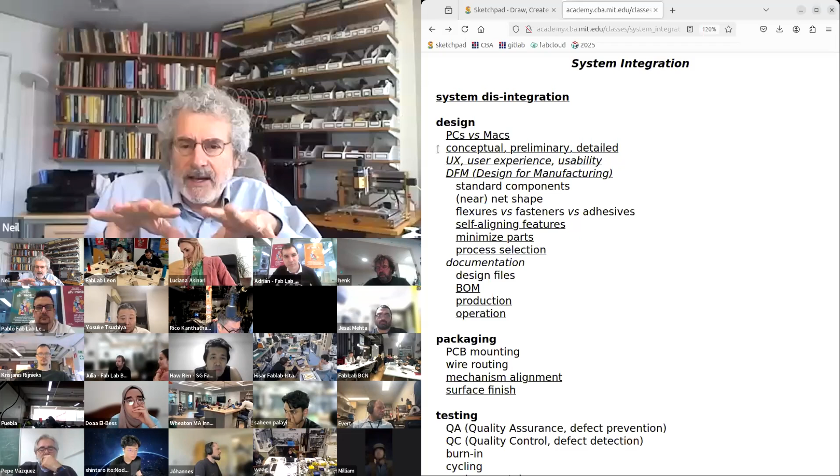Broadly, design studies go way beyond the class, but just a few comments about it. One is terms in design are similar to spiral development. Conceptual design is thinking about what you want to do. Preliminary design is roughing it out. And then detailed design is exactly that, it's filling in the details. But you don't want to do detailed design too early - you want to pass through these stages to refine the design before you fill in the details.

This is a recitation done by a Fab Lab guru that's a nice tour through the subject of how to make designs usable. He talks about a number of basic principles of design. It should be easy to figure out what it does. He has this great example of a button that can go either direction, and it's just not apparent what the button does and what it means.

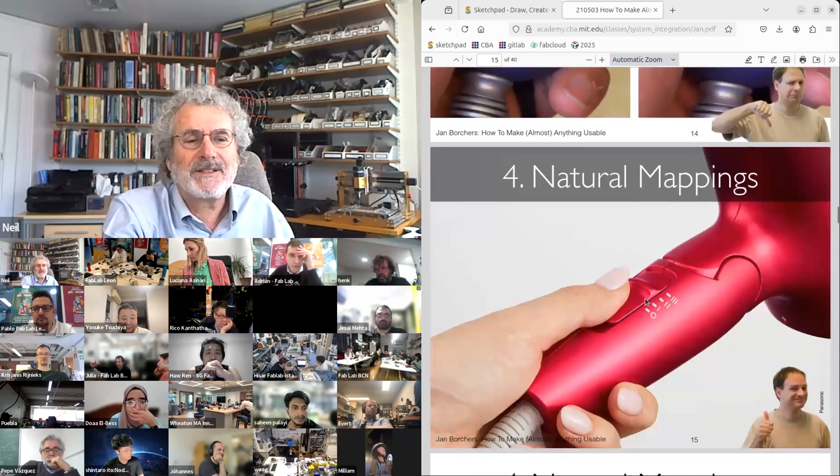You want mappings to map onto the physical action. You want to avoid modes, so you need to know what state the system is in. These are just some general principles of good design.

This was a topic just on usability, and there are a number of versions of principles for what make good interfaces. These sound obvious, but each of you have struggled with systems that violate these basic principles. So these are just some pointers for principles of good design.

Then DFM is design for manufacturing. The class you're taking will help you with that, in that there's a huge difference between design by somebody who's just sitting at a computer and design with somebody who's familiar with the process of fabrication. So you don't want to design just what you think, you want to design around the process to make it.

One approach is trying to use a small standard set of components. Net shape means you want to minimize processing. For example, 3D printing done well is net shape - you make the final shape in one go. Typically in manufacturing there's some post-processing, but you want to try to minimize waste in the process.

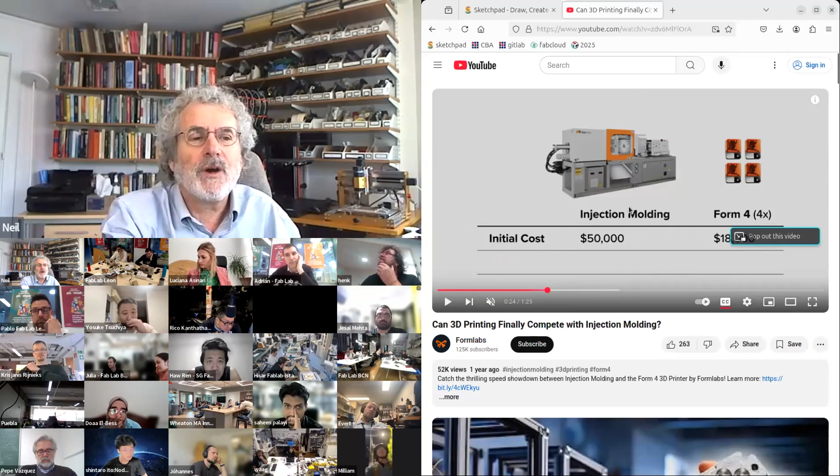The reason I'm showing this is Formlabs did a competition between fast 3D printing and injection molding. They're a bit biased, of course, but showing that a farm of fast 3D printers can beat an injection molder for a reasonable sized run. So part of DFM is picking the process you're going to use to make it and then designing around the constraints of that process.

And the design, for example for 3D printing, you need to get the resin out of it. For injection molding, you need the runner to get the melted plastic into it. So you want the stages in the fabrication process to propagate all the way back into the design process.

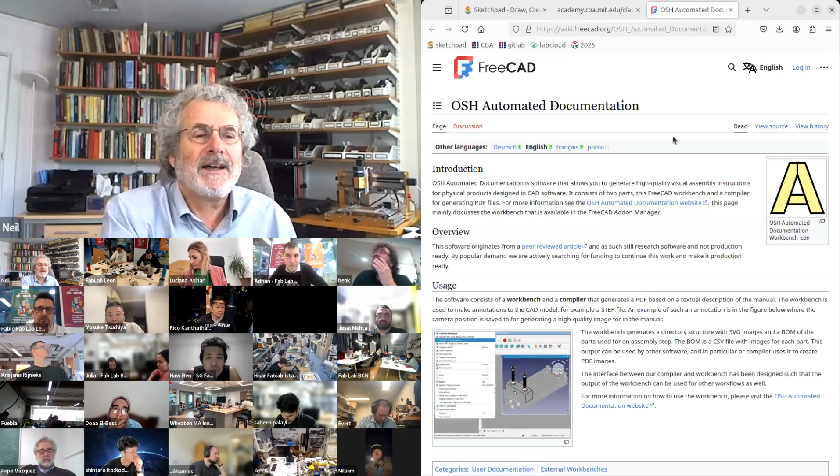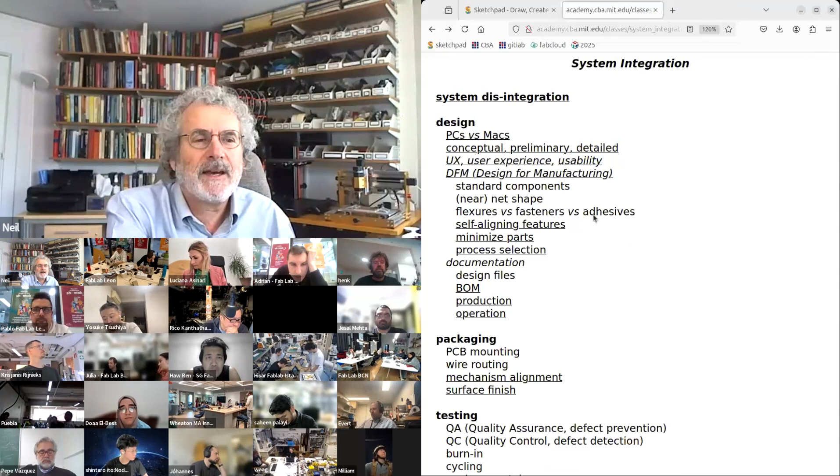This is a really nice tool that comes out of a group at a Fab Lab in Hamburg with collaborators that aims to automate documentation. You do the design and it automates producing the documentation for it. Part of the documentation is how to use it - Howtoons was a project started by former students that make these really great cartoons to teach you how to do things. The manual can be boring and tedious, or you can add value in explaining how to use it. These are all steps in documenting your work.

So please don't finish this class with a rectangular box with laser cut finger joints and call it done. Think about packaging that's interesting to interact with, design of a system that's interesting to interact with, that's satisfying for the ergonomics.

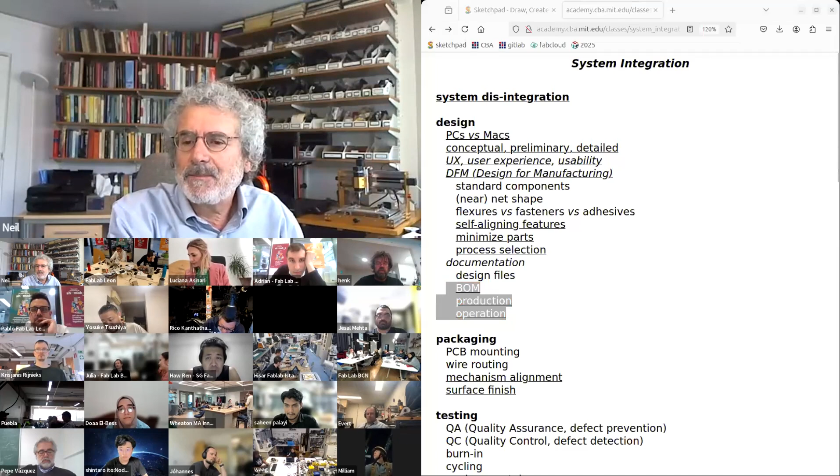Yeah, and I'll absolutely - that's a nice comment. Let me go back to...

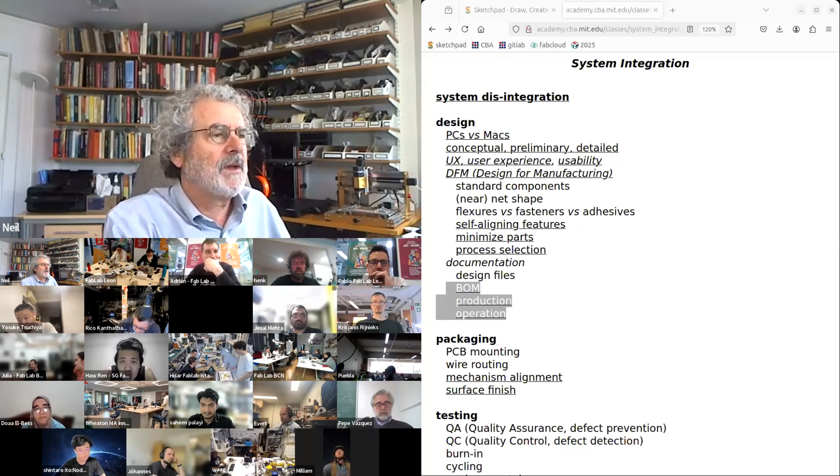One of the gods of what I'm talking about here is Don Norman, and this is a fabulous book about the design of everything. The cover is a teapot that pours on your wrist. It's a beautiful tour through good and bad design of everyday things. I'll add a link to that.

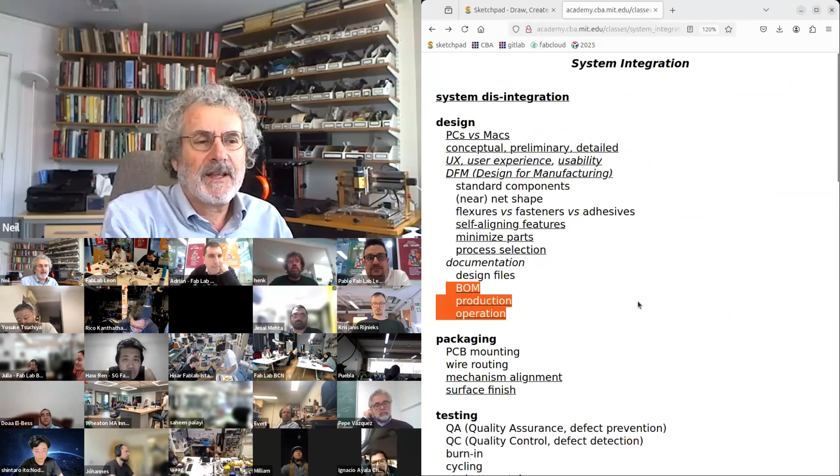So just some general thoughts about good versus bad design. It may sound soft and intangible, but it's the difference in the fate of Apple versus IBM.

Then comes packaging. So if we look at this project, one thing that's wrong is circuit boards can't be just dropped in a box - they'll fail if you jiggle them. You need to mount the electronics.

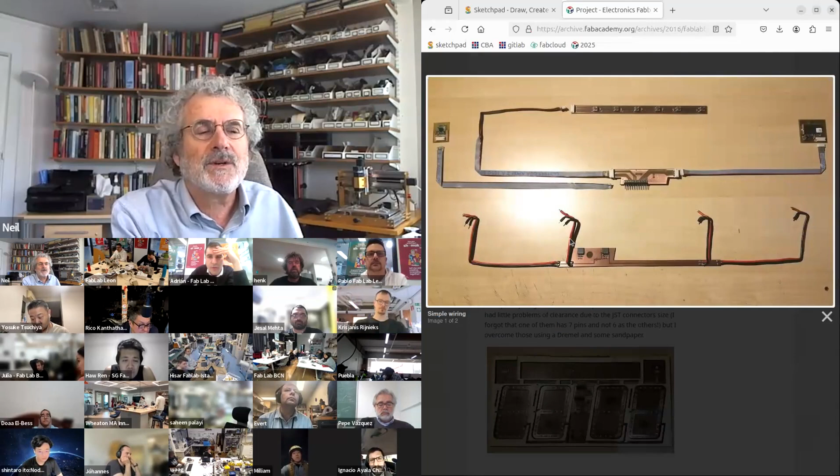Let me add a link. So in this project, you'll see this design of the wiring harness. Rather than a tangle of wires, they designed the wiring to connect all the parts.

Here's why that matters. When the Airbus A380 was made, they made a mistake in the wiring, and it ended up being a $1 billion problem from getting the wiring wrong. One of the most common failure modes, and I'm going to talk a lot about failure modes, has to do with wiring.

So once you have a physical design, once you have the components placed, part of the design is the wiring routing.

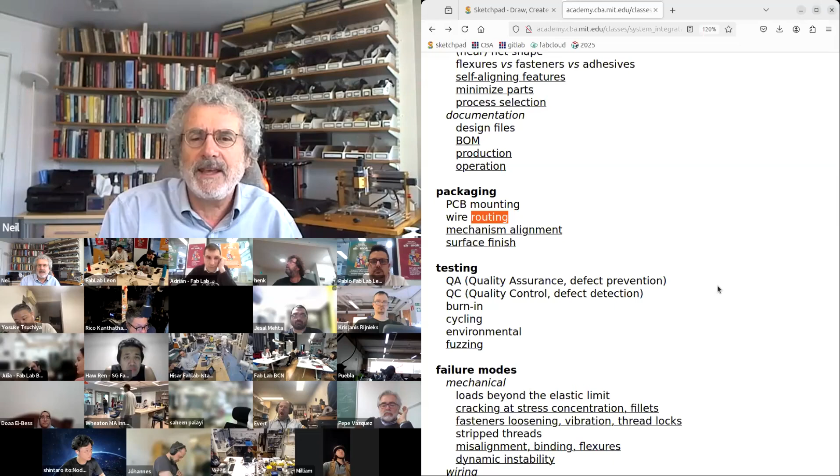It's easy to neglect wiring design as a detail at the end. In the Airbus case, it cost $1 billion to fix a mistake in it. You have to design the wiring.

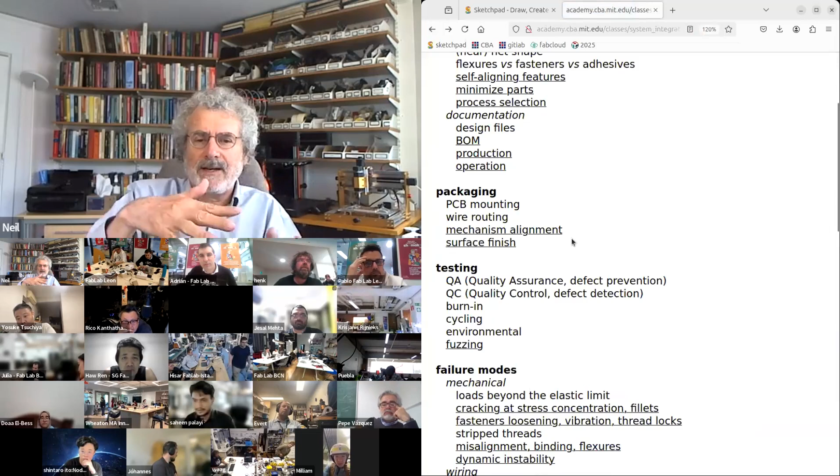The reason I have this linked is when you assemble the system, there might be slight misalignment. This is Prusa explaining that when you assemble the 3D printer, crucially, there are degrees of freedom to micro adjust and tension the wires. So in this housing, there's a little bit of degree of freedom to rotate it to take up slight misalignment when you fabricate it. You want to think about the error budget for the system and having enough degrees of freedom so that you can take up slight misalignment when you make it.

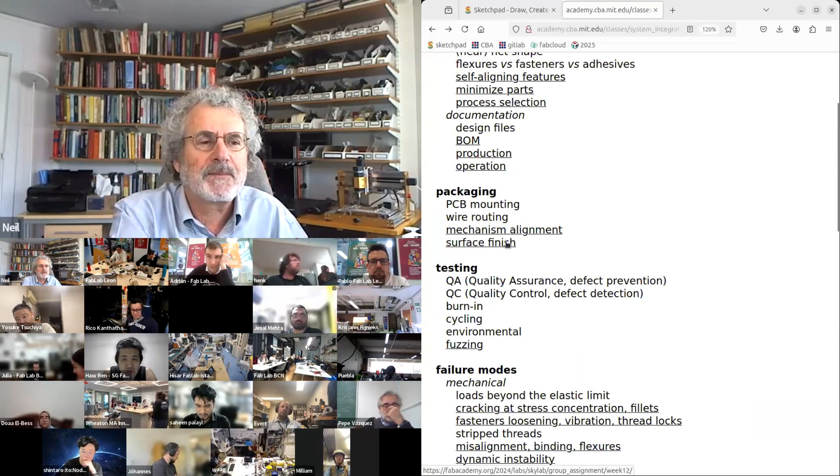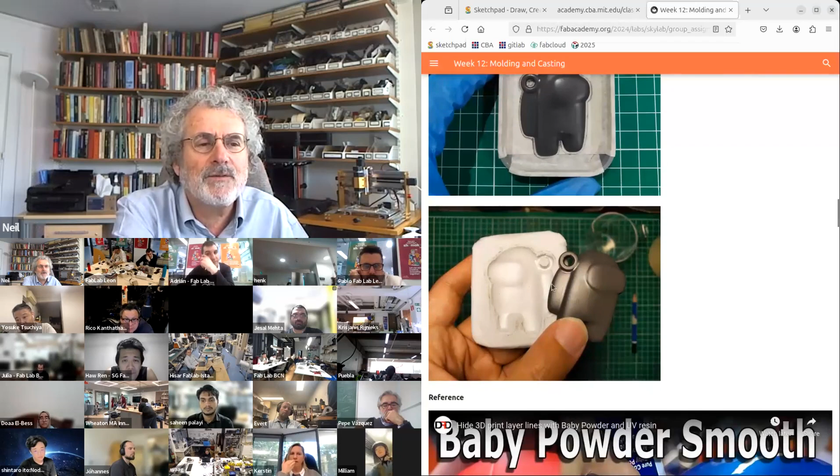In molding and casting, when we talked about molding with printing, this was an example of taking an ordinary FDM print and just doing a really good job finishing it. They're making beautiful molds from it, starting with just the FDM print and then post-processing it to make this beautiful surface finish.

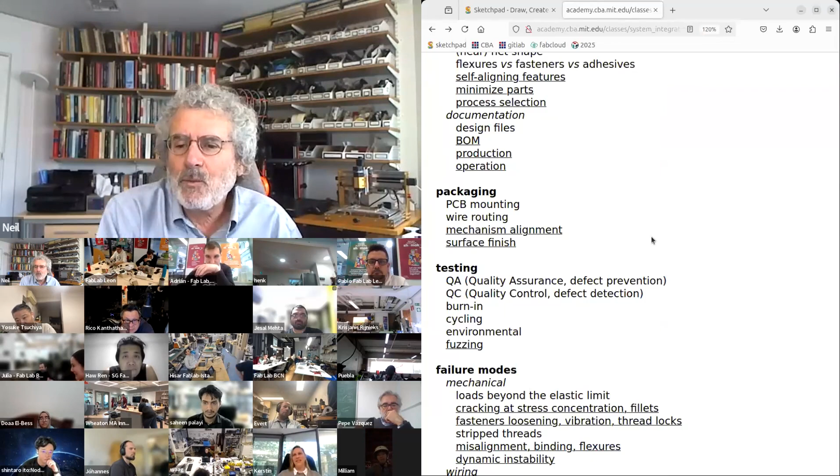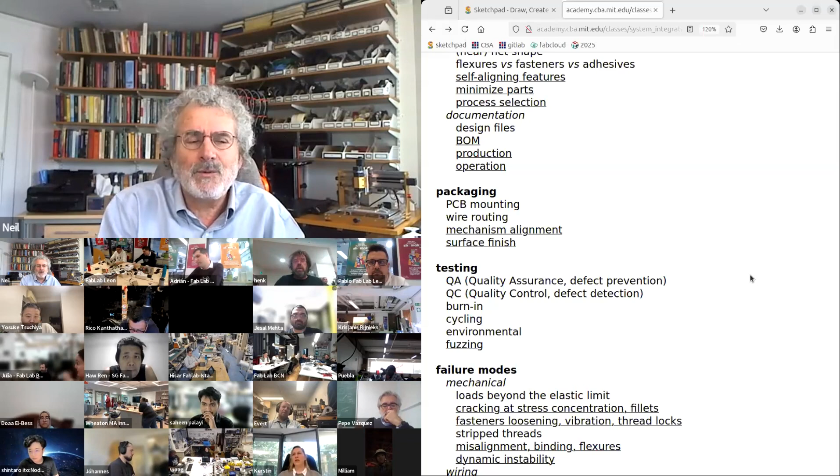One more thing that makes me sad is when you have rough machining or crude 3D printing. Beautiful objects are nice to look at and they feel good to touch. So don't neglect the surface finish at the end of the project.

So part of this week's work in designing and documenting the system integration is we're going to look for all of these things: where does the electronics go, how is the wiring routed, how do you align and assemble the system.

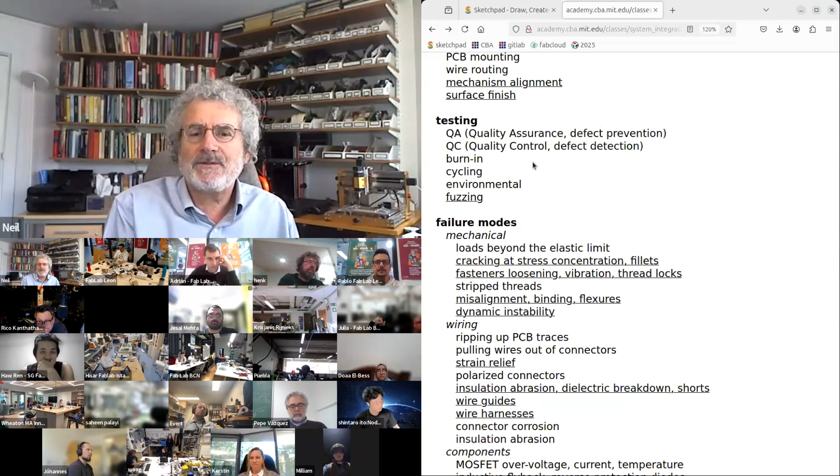Then comes testing. Almost everything you make will fail sooner or later. You want to fail while you're developing and testing it, not after you send it out into the world. Quality assurance is preventing defects in the first place. Quality control is finding defects and fixing them. Testing is identifying the defects.

First of all, one of the best ways to test a system is to shake it. If you shake it or drop it, does it keep working?

Burn-in testing is leaving the system running. For example, one kind of failure mode in software is a memory leak. Everything runs fine, but if you leave the system running for a few days, you're slowly leaking memory and it grinds to a halt. If you make a motor controller, it may work fine when you move the motor, but you're overheating, and if you run it for a few hours, you burn out the transistors. So just run the system for a while.

Cycling, turning everything on and off a lot of times, stresses the system. Often there are power transients and mechanical loads. So turn your system on and off a lot of times.

Environmental testing is: does it work when it's hot, does it work when it's cold, does it work when it's humid? There are all sorts of failure modes for that. Fuzzing is an interesting kind of testing, where you spray random junk as input to your system. It's a common way to test for vulnerabilities — you just give it nonsense and see how the system responds. You can uncover a lot of security vulnerabilities by fuzz testing.

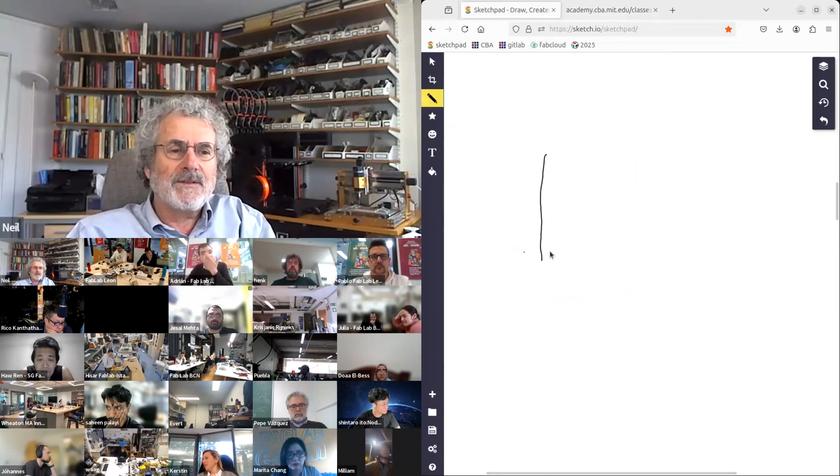Okay, so now I'm going to spend a while talking about how systems fail. First is if you look at stress versus strain — remember, stress sounds like press, strain sounds like pain. So you apply stress and the system responds.

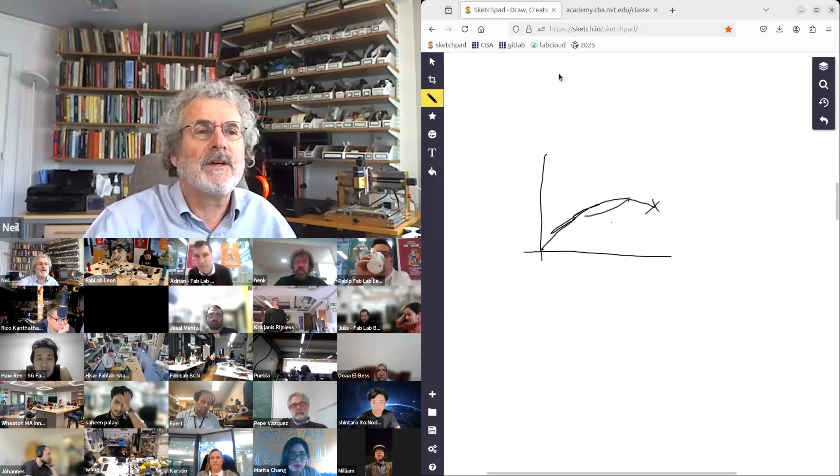There's a linear range where you're pushing and it's elastically deforming; this is fine. There's a nonlinear range that's usually okay. Then there's a range called plastic flow, where it becomes hysteretic — if you push on the system, it doesn't come back to the same place. That's bad, you're deforming it. Eventually you get to the strength limit where it fails. So you want to make sure loads are always within the elastic limit.

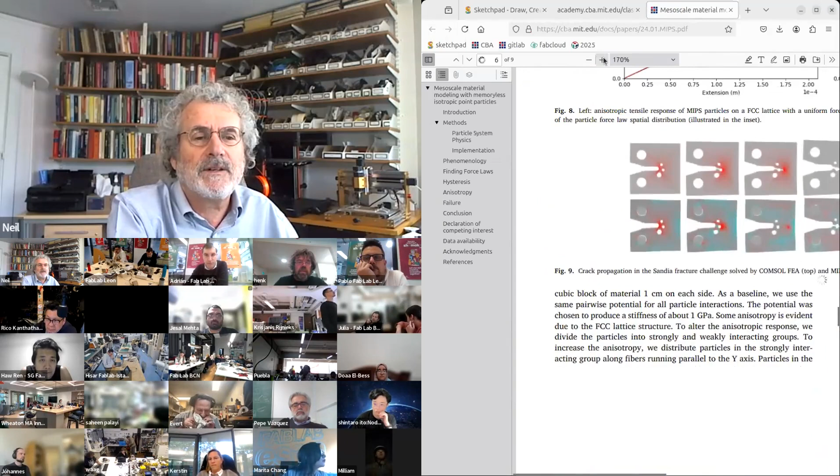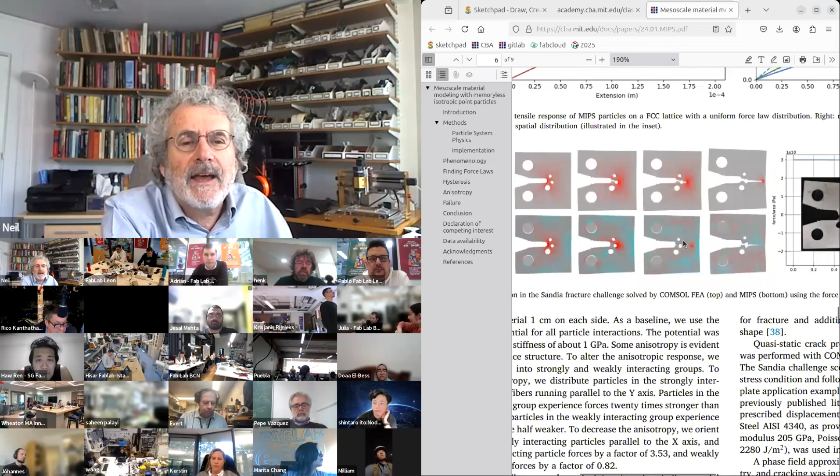I've linked this paper on a project we did on multiphysics modeling, where we cover how to model failure. Here's a test part, and when you start opening it up, there's a stress concentration, then you'll see the crack appears there and it propagates. So when a system fails, it fails where the stress is concentrated.

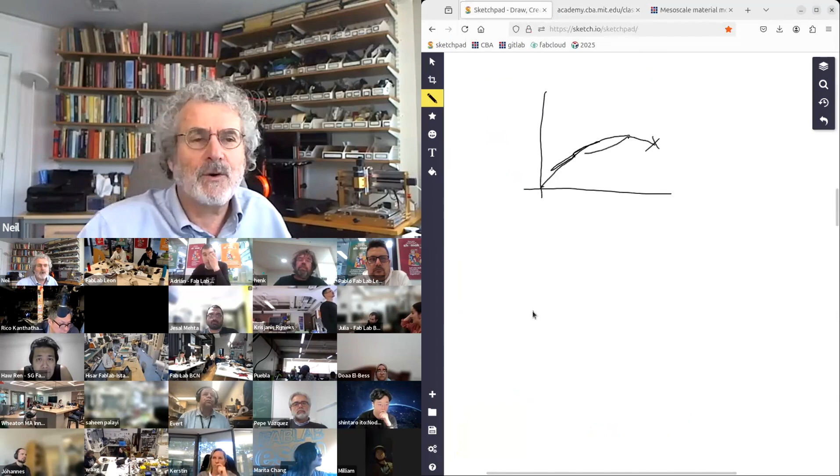A very common form of that — in fact, I just did this weekend. I failed to do what I'm about to describe for you. I needed to make a flexural clip that fit into a pipe, and so I had designed the shape of the flexural clip.

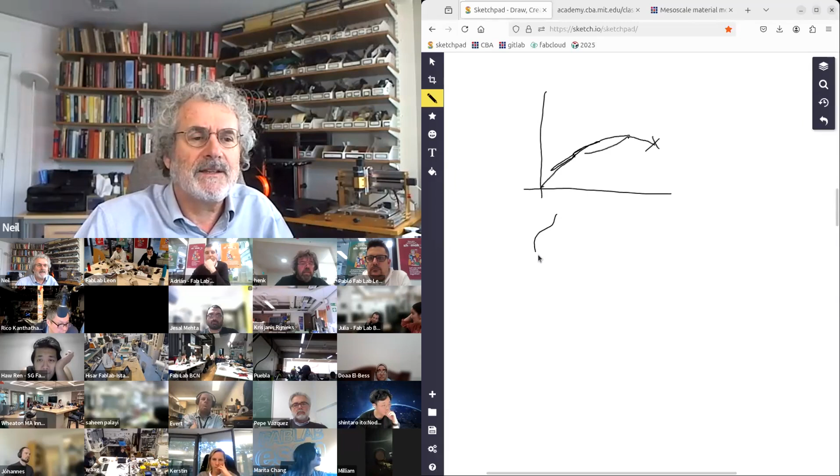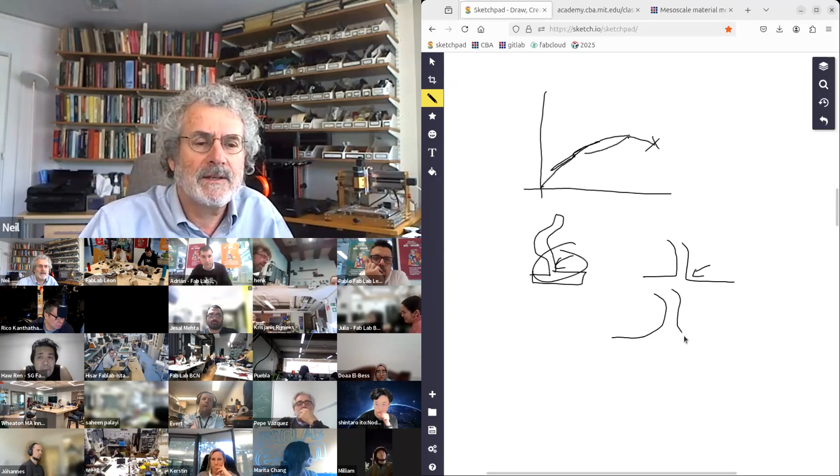And then I just put it on a base like that, and it snapped right there. The distinction is, if I blow that up, I had a sharp corner where it failed. Instead, in the second version that works, I have a fillet coming in like that. So the difference is that's a sharp corner, here I've filleted the corner. At the sharp corner, a crack initiates and propagates. When you fillet the corner, it's hard for the crack to initiate. So just simply filleting corners has a huge difference.

I'm just following along with the chat.

Filleting the corners makes a huge difference in the likelihood of failure.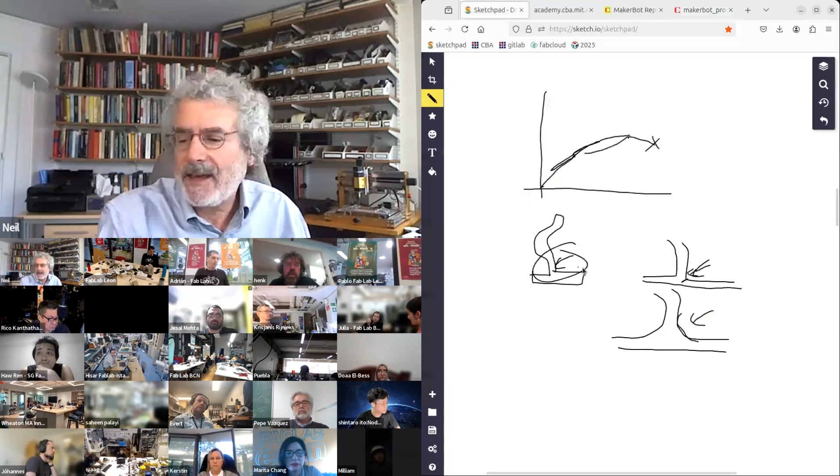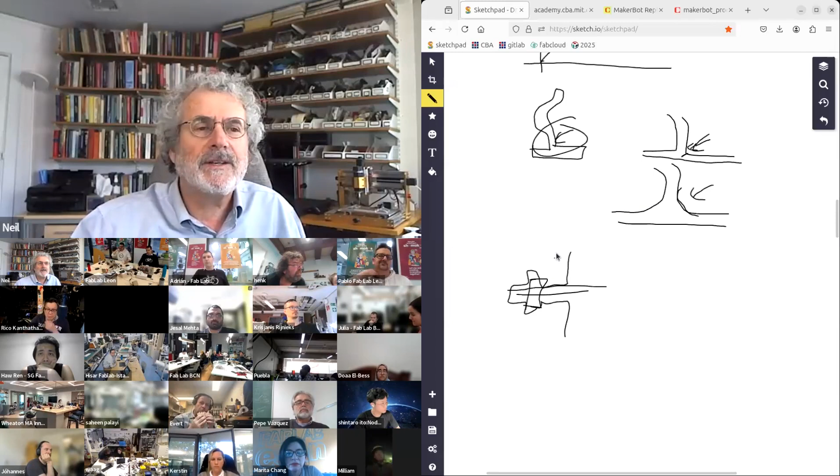This is a review of the original MakerBot Replicator. Bre Pettis describes it as on-the-job training. He did a lot of things wrong, and the most important thing he did wrong was this: nice laser cut wood looks great, but in that design he nicely designed a shape like that in the wood, and then the threaded rod comes in, and then he has a nut here. The problem is this is wood.

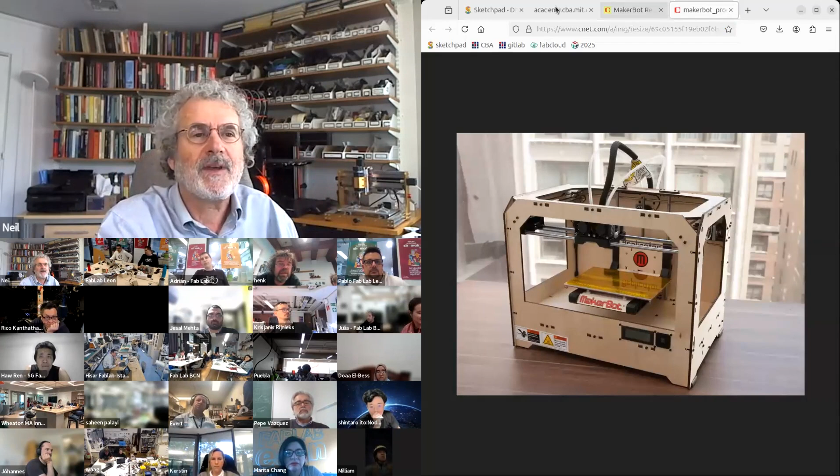If you go back to this range of plastic deformation, when you tighten the nut, it's very slightly deforming the wood. The wood is plastically deforming, it doesn't come back to the same place again. So you could assemble the MakerBot, get everything working, and then in a few weeks it's no longer printing well, because everything is drifting and moving.

So preventing fasteners from moving their position, if you're using fasteners, is essential. That's where you want to have thread locks, lock washers, lock nuts - things that prevent fasteners from moving. One more problem with threads is you can strip them.

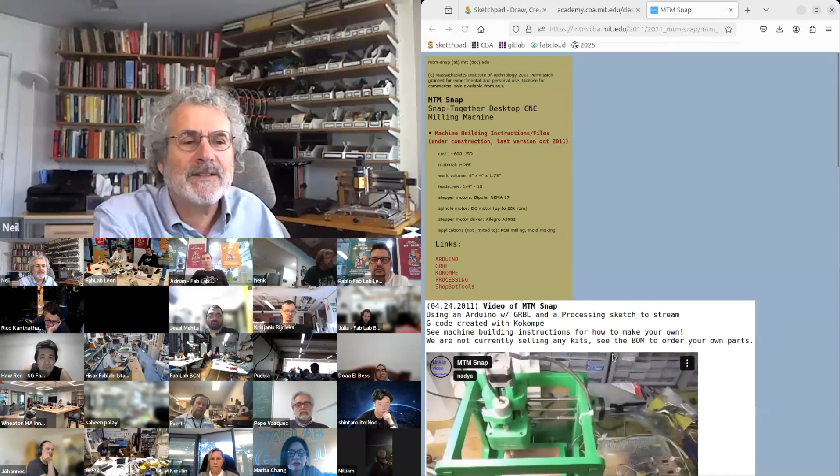If we go to the snap machine - let's see if I can. So there's a few versions here in these pictures. This was the first version. Nadya and Jonathan are good at what they do. They made it, they inspired lots of people. Multiple people tried to make it, and they all had trouble getting it to work. The problem was right where my mouse is right now.

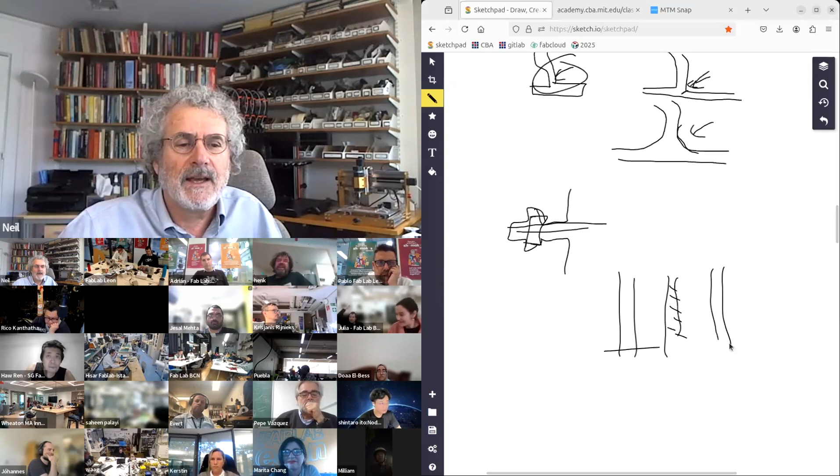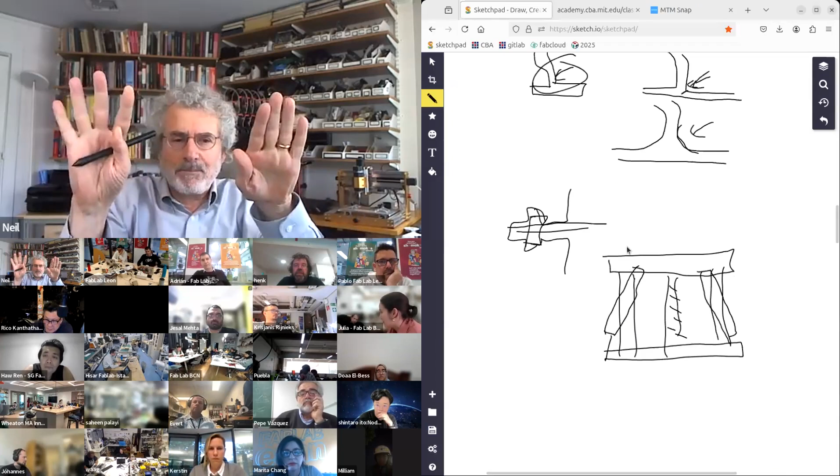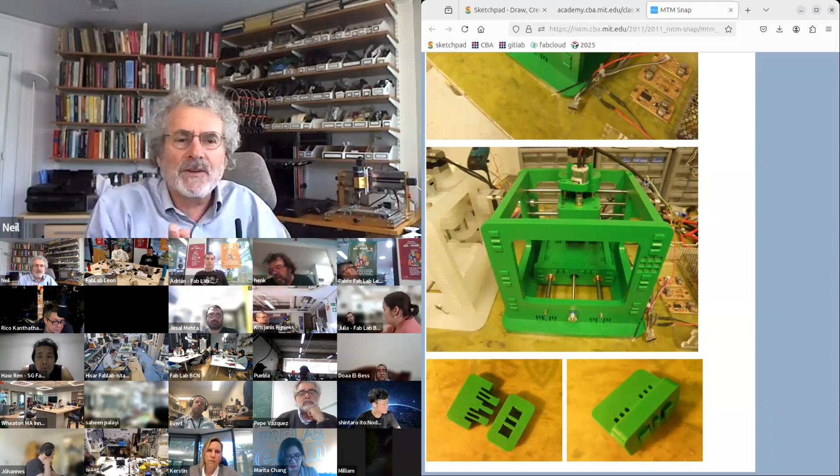In their design, you have the threaded rod, you had the guide rails, and then they were mounted. The problem was if your milling machine isn't perfectly square, the guide rails can be very slightly misaligned. I'm exaggerating - if the guide rails aren't exactly parallel, then when you try to move the stage, it'll bind and it doesn't move. So they made the machine on a perfectly squared mill, but somebody making it on a sloppy mill, the rails weren't perfectly aligned, and you couldn't reproduce it.

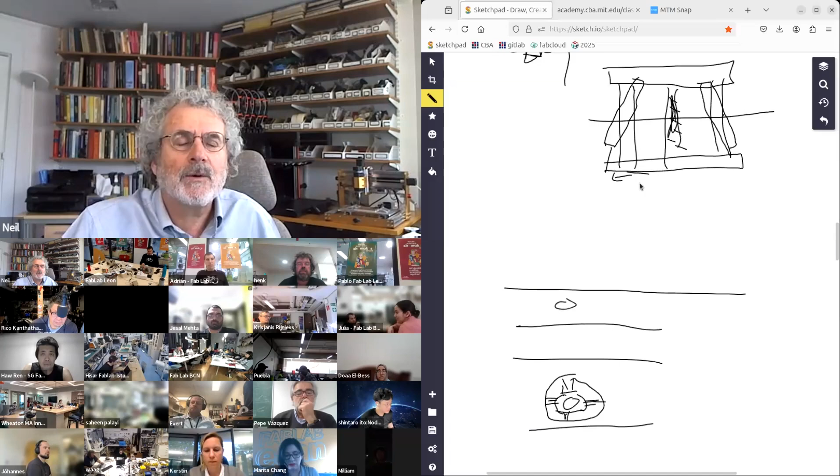The fix is almost easy to miss. In the picture there, all they did was instead of having the rail come out into the end piece directly, the rail comes out, and then - let's see - this is the end piece. They have a little flexure, and that flexure gives just a little bit of elastic motion. So in the machine, position along the thread is sensitive, but a small lateral motion about the rail isn't sensitive. If you add just a little flexural degree of freedom on the rail mounting, then if they're not exactly right, they can just move a little bit relative to each other. That went from a machine that's very difficult to make to a machine that's much easier to make.

This is an extreme form of - if you're new to it - Tacoma Narrows bridge failure. This was a really dramatic event. This was a bridge in the 1940s that collapsed. It's a bridge you drive cars over, and it looks like it's made out of putty. It started this incredible swaying, and eventually collapsed. I mean, this is a rigid road.

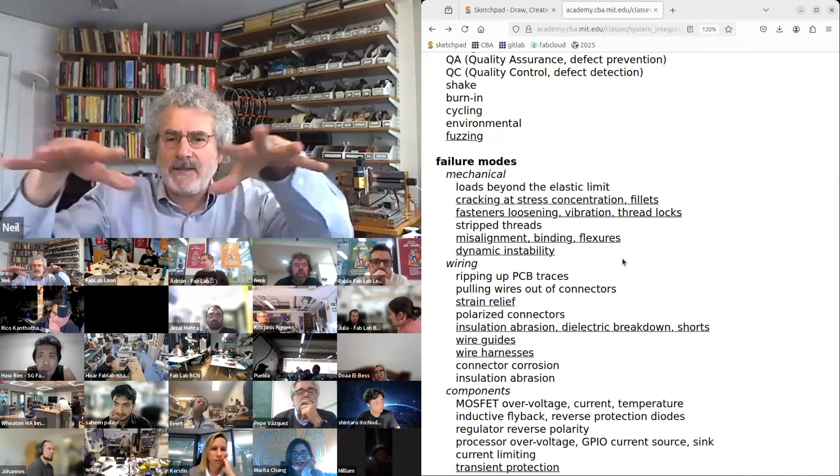So what failed there was not a static, but a dynamic instability. I described stress strain, and they had designed the bridge so it could withstand the loads of the cars and the deck of the bridge. But what they didn't think about was the dynamics. So it was windy.

The wind would come off the guy lines holding the bridge, and they would whistle in the wind, and they would vibrate back and forth, sort of like a musical instrument. The vibrating guy lines would then connect to the bridge surface, and there was a resonance, like pushing a swing, and at just the right frequency you could vibrate the lines, and then the road surface would vibrate just a little bit, but each time around it would put more and more energy in, and it just kept building up until the bridge fell down.

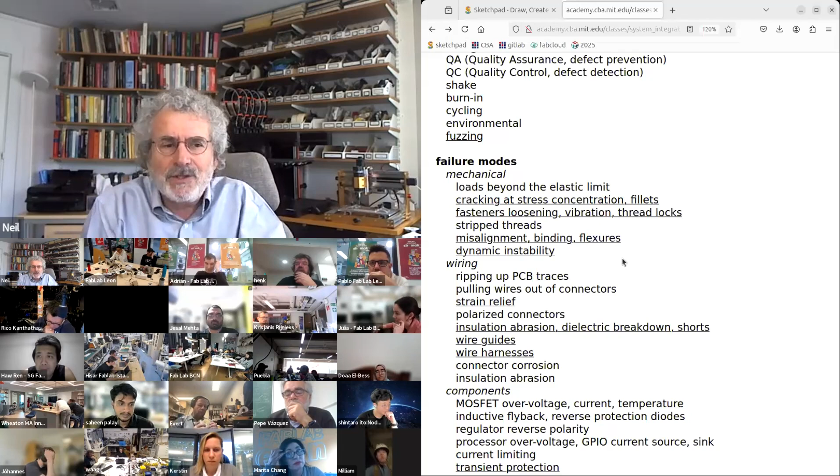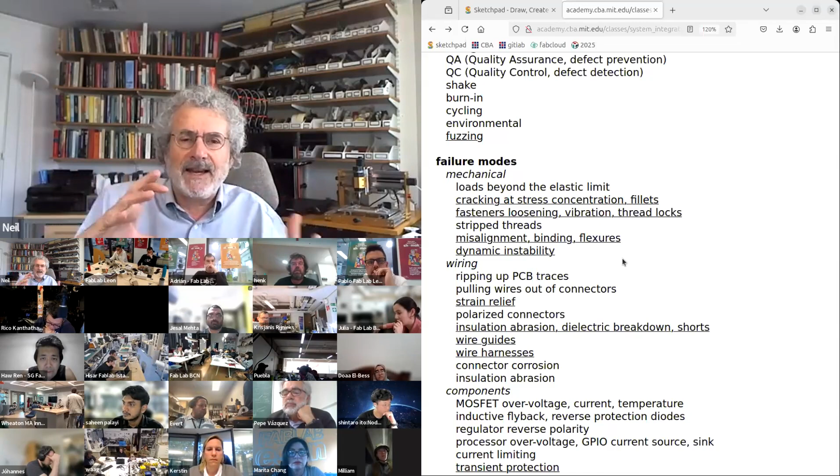So you couldn't find the failure running statically, you only found it dynamically. Another version of that is chatter. In a machine tool, a common problem is the machine tool is stiff and can do a good job, but when you start machining faster, you get chatter in the tool, which is a dynamic rather than a static problem. So you need to study the dynamic loads on the system, not just the static loads, and there's a lot of failures that happen from that.

Okay, so that's just mechanical failure.

Then comes wiring. One kind of failure mode is the copper traces on the circuit board are glued down. You take copper, you heat it, squish it, and glue it. You don't have to pull that hard to rip up the traces. So a sad thing is you design a circuit board, it's working, you bring it to the lab and it's not working. What happened is there was too much force on a connector, and as you pushed on the connector, it ripped traces up off the PCB. It's not quite as much of a problem on board house PCBs, but you can still rip up those traces.

A variant of that is you have connectors going into the PCB, and you pull on a wire and it pulls out of the connector. And so strain reliefs for wiring. Anytime something goes in and out of electronics, you want to plan what happens when there's a load on it. You don't want it to rip up the traces, you don't want it to pull out of the connector. You want something to mechanically handle the load on the connector.

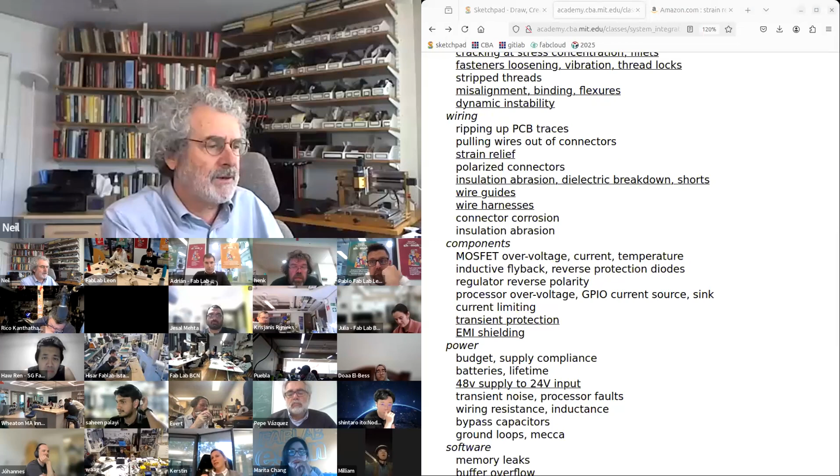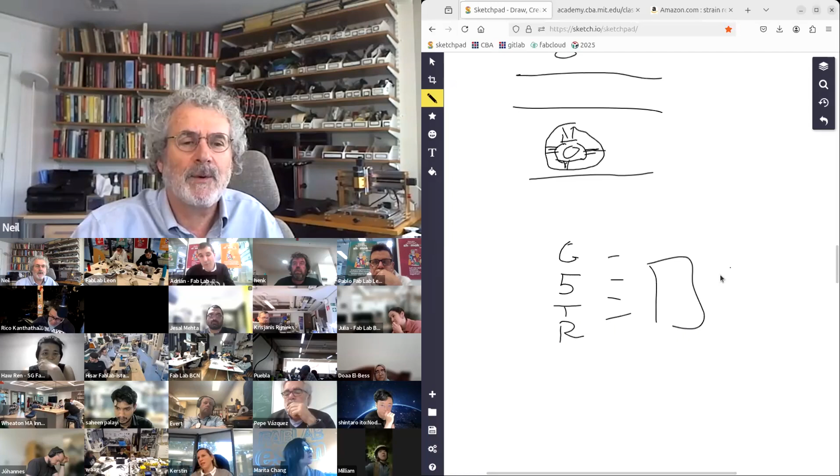Connectors ideally are polarized. Let me add a note on that. When you might have a wiring harness, I'll give you an example I did recently. I had a wiring harness that had ground, power, transmit, and receive. All of that went to a board, and then that went to another board, and there was an in and an outside. If you connect it backwards, in this case you're connecting the 5 volts accidentally to the transmit. What that did was, on the board, it went to a microcontroller, and the board was running at 3 volts. Connecting 5 volts into the transmitter on the 3 volt processor actually went through the processor and killed the regulator.

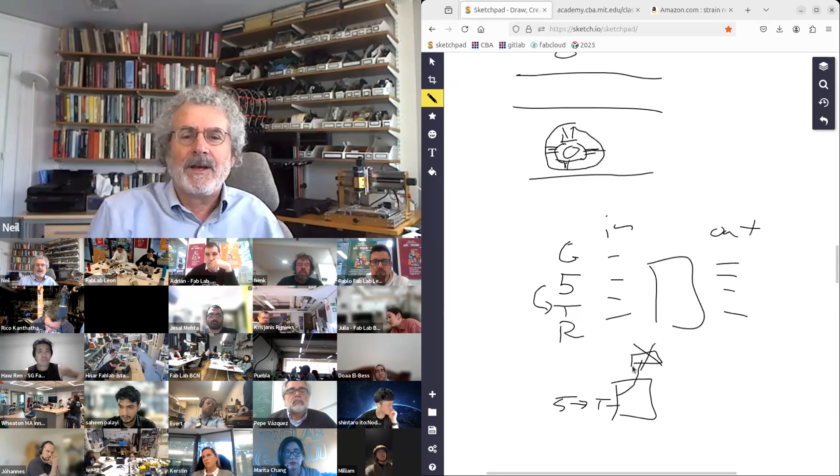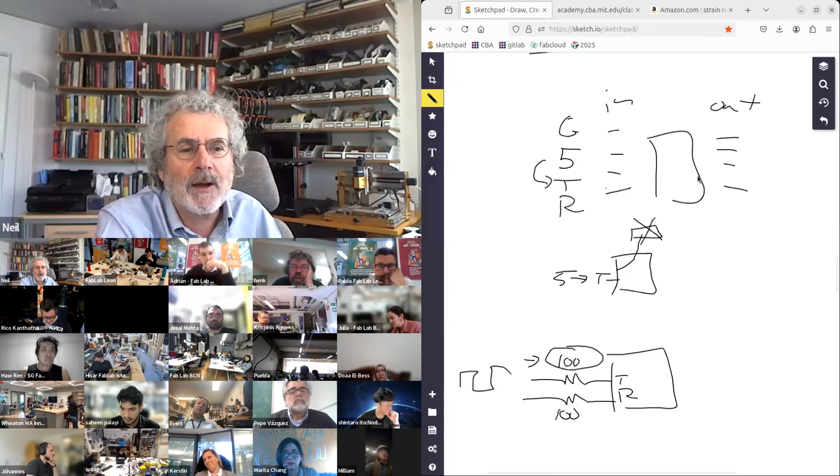So one way to avoid that is connectors that are polarized, so you can only connect them one way. Another common thing you'll see is if you have a transmitter and a receiver, say GPIO pins coming off of the board, you'll have a 100 ohm resistor. The 100 ohm resistor is small enough that it doesn't limit how fast you can send data, but big enough that if you misconnect and try to put voltage into the output, it serves as a current limiter. In fact, the problem I described, I fixed by putting in a 100 ohm resistor to protect the circuit.

This plane crashed, everybody died from a fire, and it had to do with wiring insulation. In the output devices class, I talked about kilovolt per millimeter, and less than that for smaller gaps is dielectric breakdown. Wiring insulation can abrade if you rub it, and can break down with voltage on it. It turns out that Kapton was being used, and it was flammable, and it caused the fire that led to the plane crash.

So Jacob is asking about the 100 ohm resistor. Jacob, I don't do them automatically every time, I do them where there's a chance to misconnect it. I don't do it if I'm just making something for myself, but what I described was used in a collaboration with a global company sending parts all around the world. So the 100 ohm is if there's a chance of misconnection, and if you need to worry about users outside of your supervision.

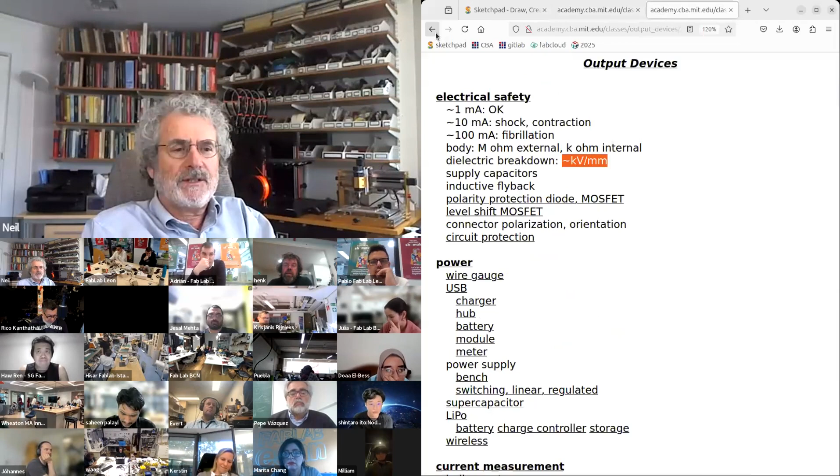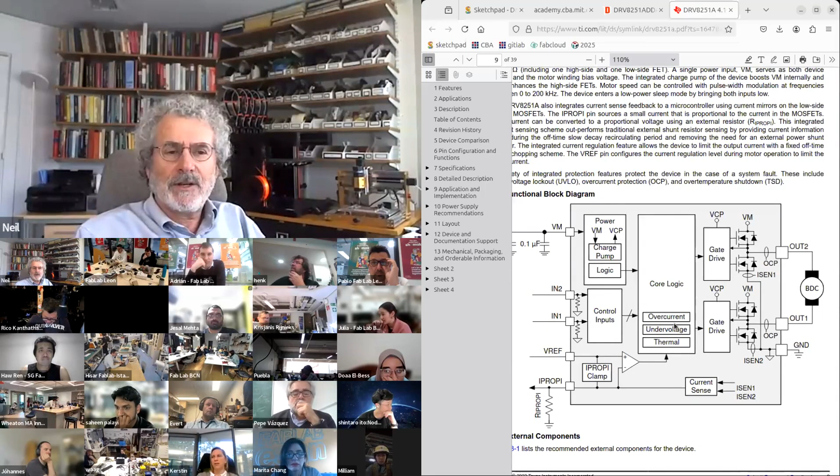Once you're doing power electronics, it's very common to burn out your power transistors. In a nice H-bridge, like this output device module, it checks: are you asking for too much current? Do you have not enough voltage? Is it overheating? If so, it'll turn everything off. If you're using it as a motor controller, the motor will stutter, and the stutter tells you it's protecting you from killing it. If you're just making your own transistor circuits, they'll die—you'll blow out the transistors.

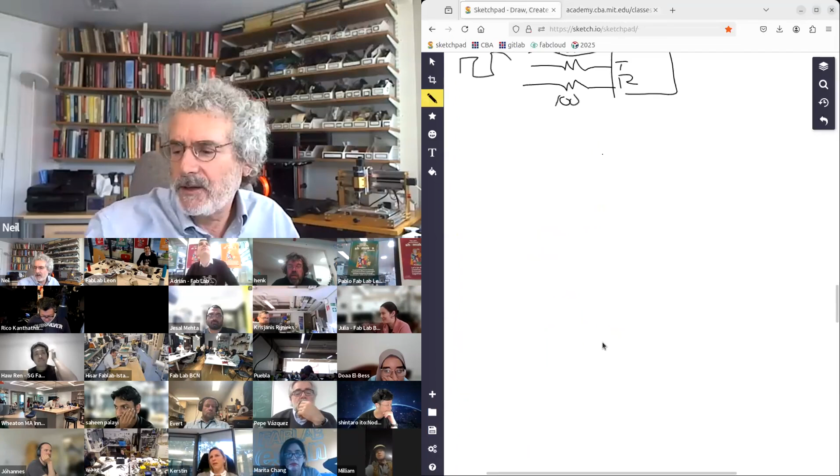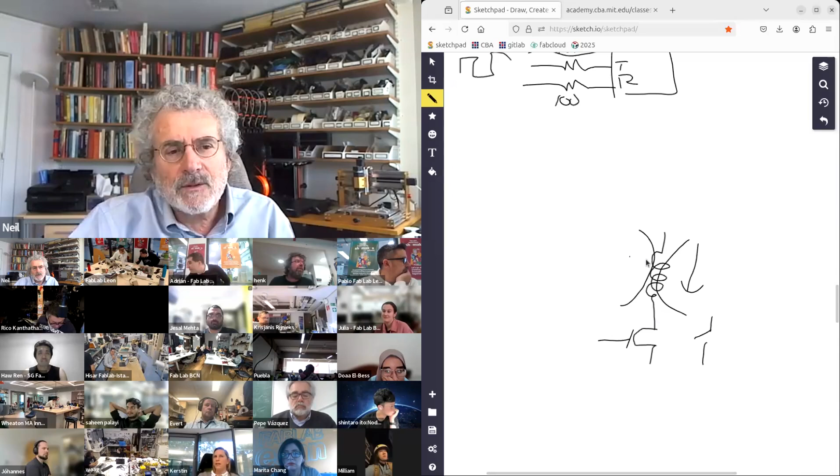And then a big one is inductive flyback. Remember, a motor looks like a coil—it's got a magnetic field going through it. If we then go through a power transistor, conceptually, when you open a switch, we've got current flowing. When the current stops, in effect it tries to keep going. The magnetic field quenches, and you get a big voltage and current spike—you can get kilovolts. That voltage spike can easily punch through your power transistor.

A common solution for that is to have a diode. Current should always go in the forward direction, but you have a reverse protection diode that normally does nothing, but it prevents current going in the wrong direction.

If you connect, in the example I just described, 5 volts to a 3-volt processor, you'll kill it.

I'll add a little more detail. By current limiting, what I meant there was things like the 100 ohm resistor that prevents you from shorting. These are parts whose job is to specifically switch quickly for high voltages to protect your circuit.

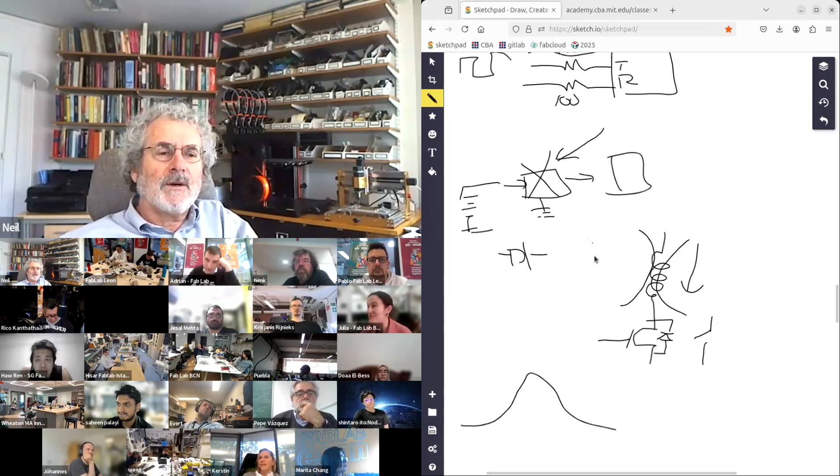The regulator—if you put power the wrong way, if you try to power the output rather than the input, that typically kills the regulator. One way to prevent that is with protection diodes. The diode makes current only go one way, so you can't run the regulator the wrong way.

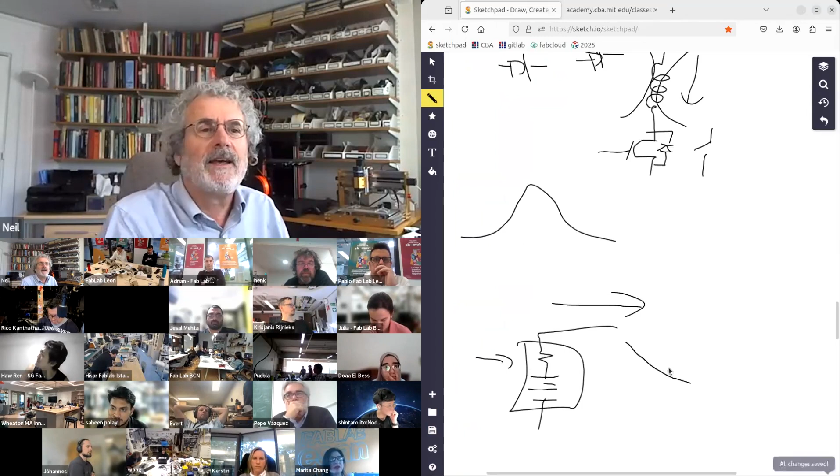Then there's power failure. You need to design the power budget of how much current and voltage you're going to need, and make sure your supply can do it. A power supply acts like an ideal battery with a resistor in series. This resistor is the compliance, and what it means is as you pull more current, the voltage droops. So you need to make sure your power supply has enough compliance, so when you're pulling full current, you're still getting the voltage you test at lower current.

Batteries—the voltage drops, batteries have a lifetime. I've had projects fail when it seems like there's a software bug, and all that's happened is the battery voltage is dropping, so the processor is running marginally.

This was at a Fab Academy boot camp. We had a disaster because connectors weren't clearly labeled, and in putting the system together for this nice milling machine, one of the instructors, who will go unnamed, connected a 48-volt supply to a 24-volt input and blew up the system.

A really tricky power issue is this: you have your power supply, 5 volts, 3 volts, and ground. In between them, say, is your processor. And over here, say, we have a motor in an H bridge with power electronics driving it.

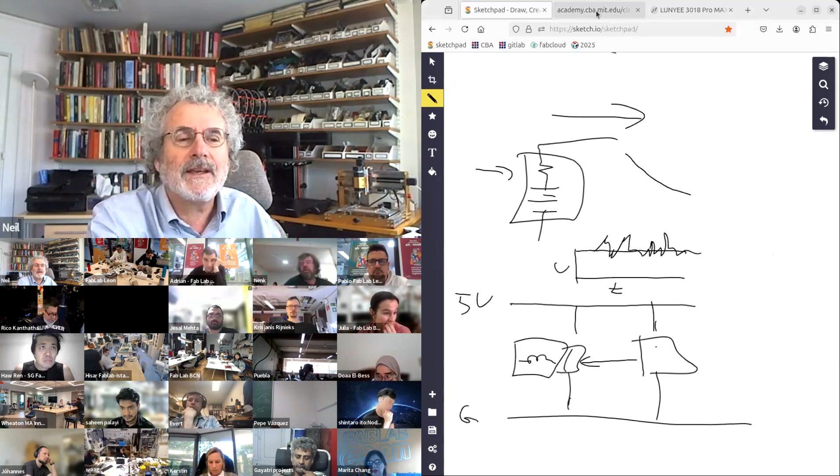This is really tough to debug because when you're running, it looks like you're getting software errors. The software errors are because your processor keeps resetting itself. But what's happening is the motor switching is creating transients on the power line that are coupling into the software.

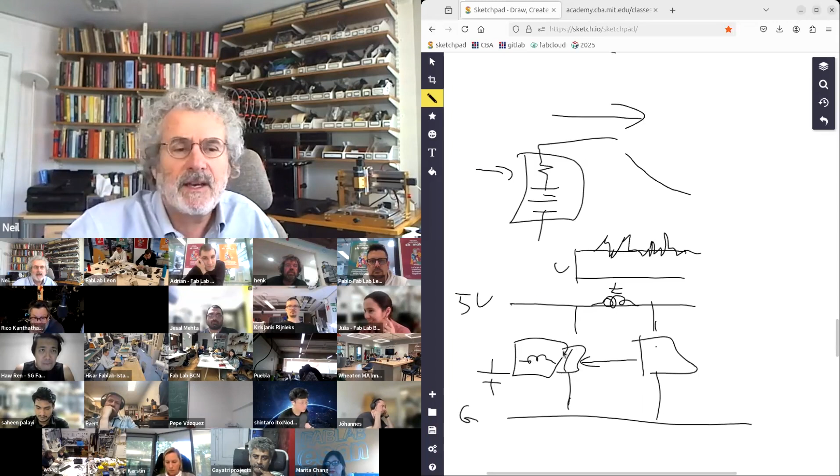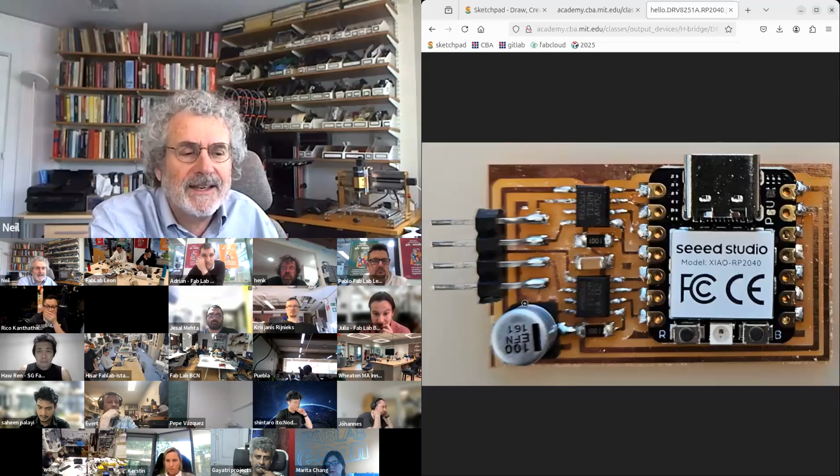To prevent that, one way is having inductors in the power line. One of the main ways is having big capacitors for bypass. A common cause of these issues is not having enough bypass on output devices. Like on this H-bridge example, the first version I didn't put enough bypass on it and had all sorts of issues. So I ended up putting in a much bigger bypass capacitor.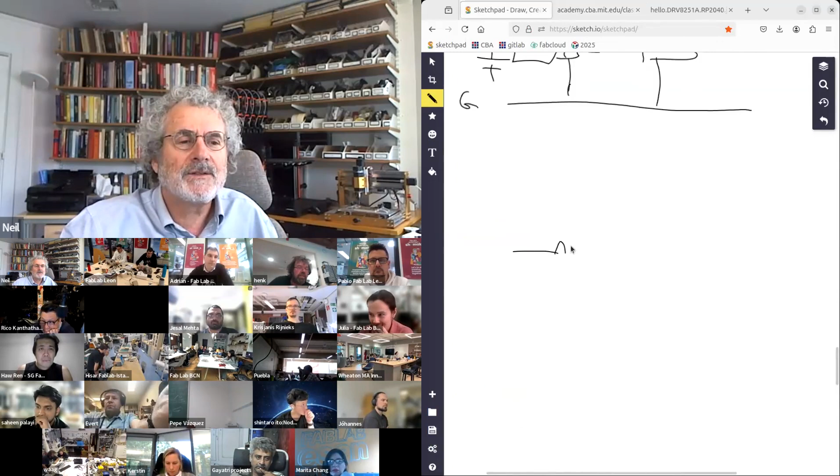Then there's wiring. A wire has resistance and it has inductance. The inductance limits how quickly you can ramp current, and the resistance, remember, power is I squared R, and that's heat and that's dissipation.

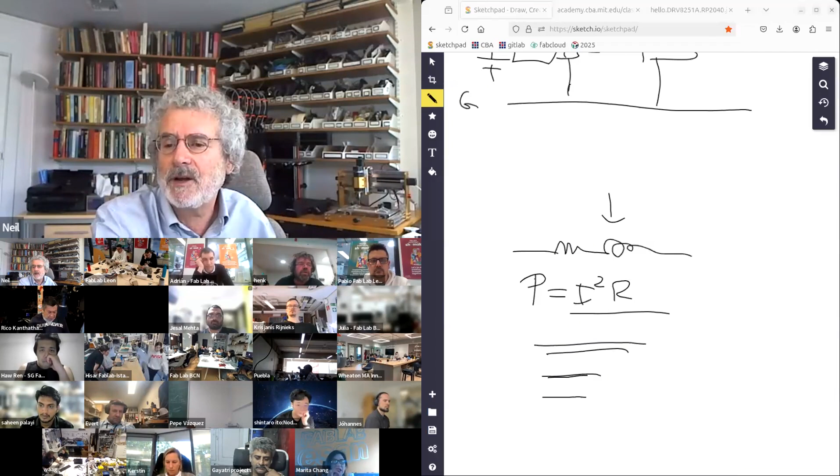In fact, Henk, can you put in the chat the page for the study somebody in your lab recently did? Somebody at the Waag looked at their specs for how skinny a wire can be and how much current it can handle. Waag did a test on failing wires by pulling too much current through them. Once you have more current...

Grounding, how you ground really matters. So a minute ago I drew this: this was power, this was ground, and I described some things connected in this circuit.

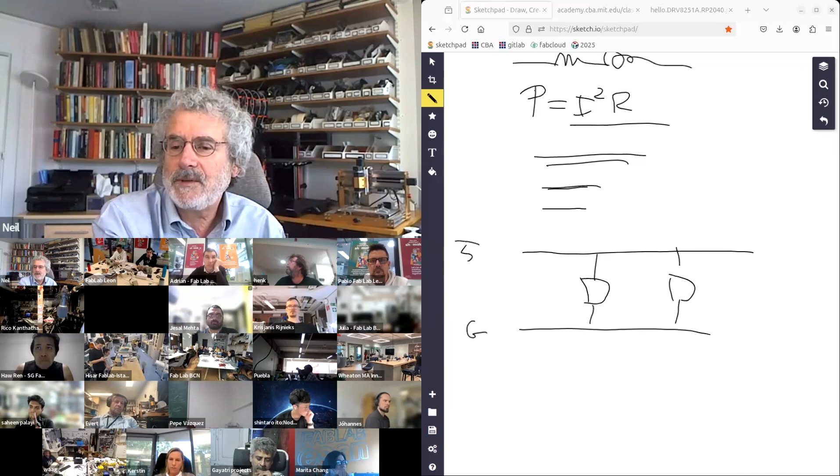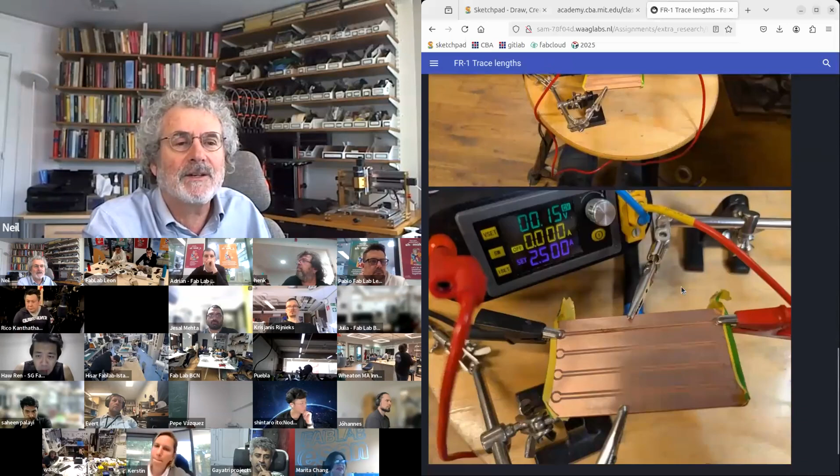So this was a test at the Waag - I'll link this - where they made skinnier wires, pulled a lot of current, and then watched to see how they failed. What I just drew here is a terrible idea.

Here's why. What you want to do is, if this is your supply - now this matters for high current, not for low current - the reason what I drew here is a terrible idea is, remember, there's some resistance in the wires. So if you do it like this, if this device is pulling a lot of current, the voltage on this device is going up and down.

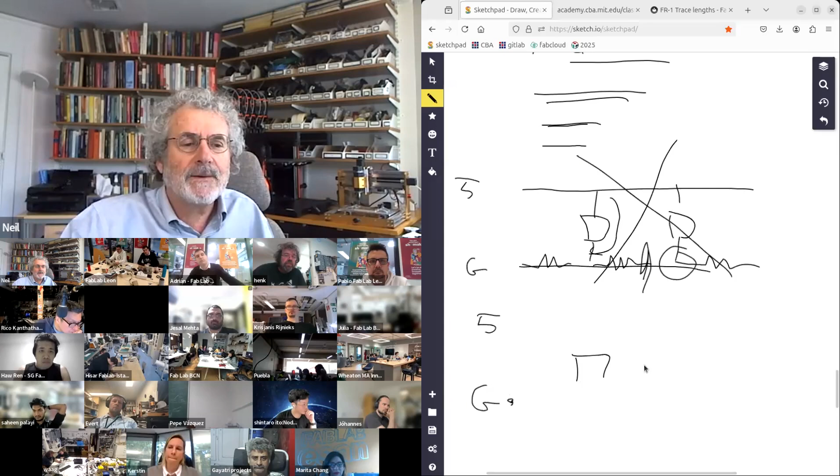So what you want to do is have what's called a ground mesh, and you want to bring power to your devices, and then route them to the ground. Conceptually, these are the same thing - the power goes there. But remember, each wire is a resistor and an inductor.

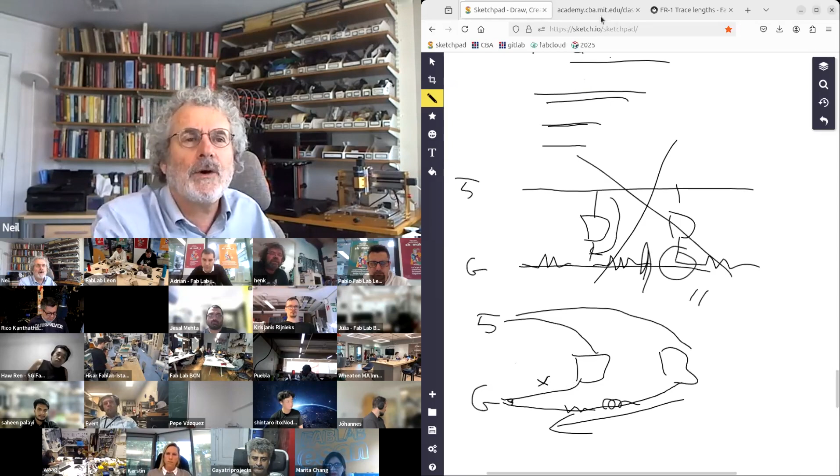At low voltage and low current, if you just trace the wires, these two are the same thing. But when you're pulling a lot of current, if this pulls current, it doesn't mess with the ground for this one over here. So for low noise or high current, you want to route all of your grounds to one place. If you ever hear a hum on a microphone or audio system, that's an example of getting that wrong - it's called a ground loop.

Okay, next comes how your software fails. So I mentioned memory leaks - if you allocate variables and then...

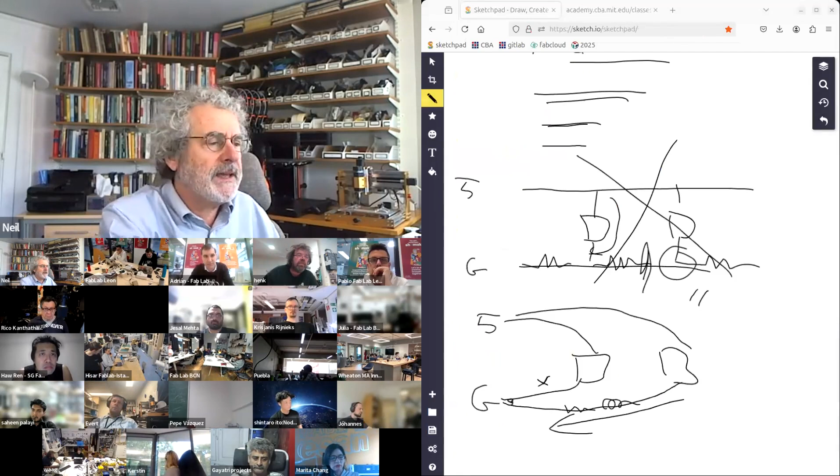Jacob is asking about a ground plane. Ground planes are for a slightly different reason - yeah, ground planes help a bit.

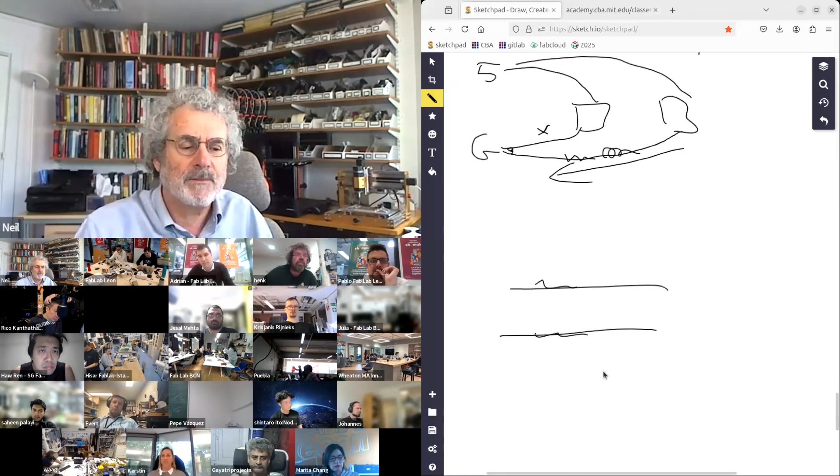A 2-layer PCB routes traces on the top and traces on the bottom. A common 4-layer PCB has traces on the top, traces on the bottom, and then an internal ground layer and a voltage layer - a whole plane of ground in the circuit board. The ground plane reduces the resistance, so if you pull current, it helps distribute it and it helps shield. That helps on a circuit board.

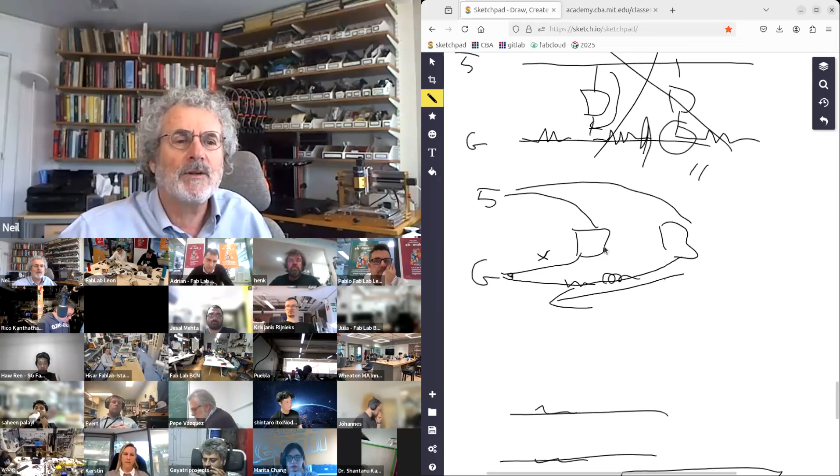Generally, what I'm describing here isn't on a circuit board. Here, I'm describing multiple different components in a system, like a 3D printer controller.

Okay, so many software environments will let you write bad software where you allocate memory - you may not even be aware you're doing it - and you don't reclaim it, and eventually you run out of memory. More recent languages like Rust prevent you from doing this, but C or C++ let you leak memory.

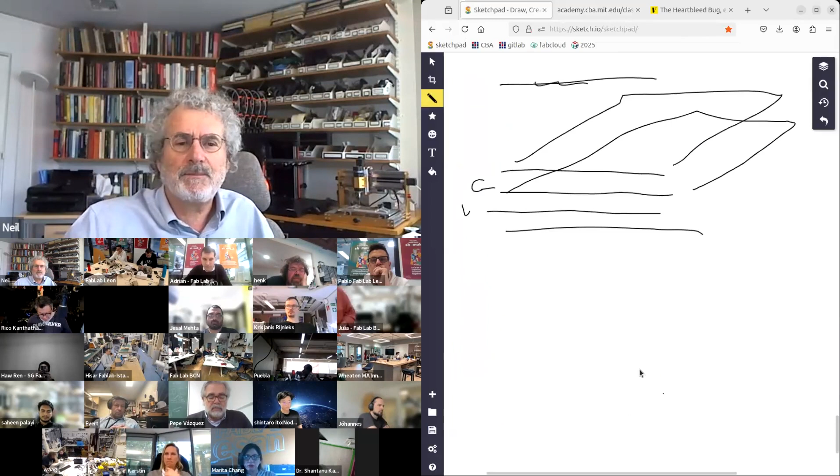This is an explanation. I had mentioned Heartbleed in the security class. This broke the internet for a while. It was one of the most serious security failures on the internet, and it was a buffer overflow. Again, Rust won't let you do this, but in C or C++, you can have a buffer allocated, but then try to read or write beyond the buffer. That lets you access things you're not supposed to see, and that can go from bugs to software attacks.

Again, Rust won't let you do this, but C will. A race condition is when you spawn threads in C. Each thread does a task, but unless you synchronize them, the output of your program depends on which task finishes before the other. Those can be really tricky to debug because it can depend on the operating system scheduling.

Variable scope is nasty. In a program you have modules, and if you have a global scope, you can have a variable here that interacts with a variable in a way you don't expect down there, because it happens to have the same name or is used for a different purpose. So generally you want scope to limit variables, keeping them local so they interface globally in a controlled way.

I had mentioned, again in the security week, that you may think you're writing good stuff, but like last week in application programming, I covered a bunch of different libraries you can use. Those libraries can introduce dependencies. You write good, careful, secure code, but a package you pull in can be vulnerable. So there's a big package of issues around just vulnerability from your dependencies.

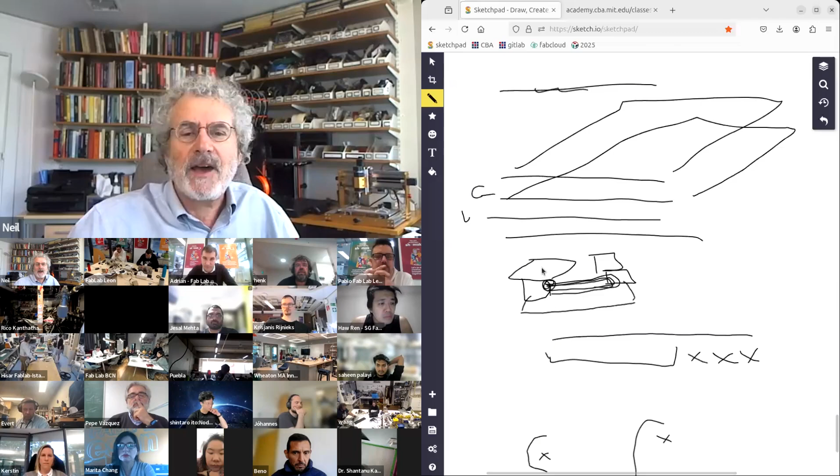We had the computer running the shop bot, and we kept getting glitches, weird issues. So we just got a really fat metal braid, like a 1-inch strap. We took the ground on the ShopBot controller and the ground on the power outlet at the computer, and put a really fat ground strap between them. Then everything started working. What was happening is the ShopBot was plugged into building power, the computer was plugged into building power, but the building ground wasn't a good enough connection, so the voltage was changing between them. We put this fat strap and grounded them better to each other, and then it started working.

Scaling - this is a link to the math class I teach, and a lot of that class has to do with order. The order of an algorithm is how many steps it takes versus how large the problem is. A good algorithm is order n. A terrible one is exponential, e to the n. N-squared algorithms are often borderline. N log n is more efficient. All of this shows up in scaling.

So if you take the magic cards and want to recognize them with an image recognition system, it might work for 10 cards but become unusable for 1,000 cards. You won't see that in small testing - you need to understand how it behaves as it gets bigger.

In fact, there's a beautiful article from a colleague in my lab. You can actually have, like water boils or ice freezes, phase transitions - you can have phase transitions in the complexity of a problem. So testing as you go from small to big can lead to very different behavior. It's not at all straightforward that if you add more cards to the system, there'll be a linear change in how well the system works.

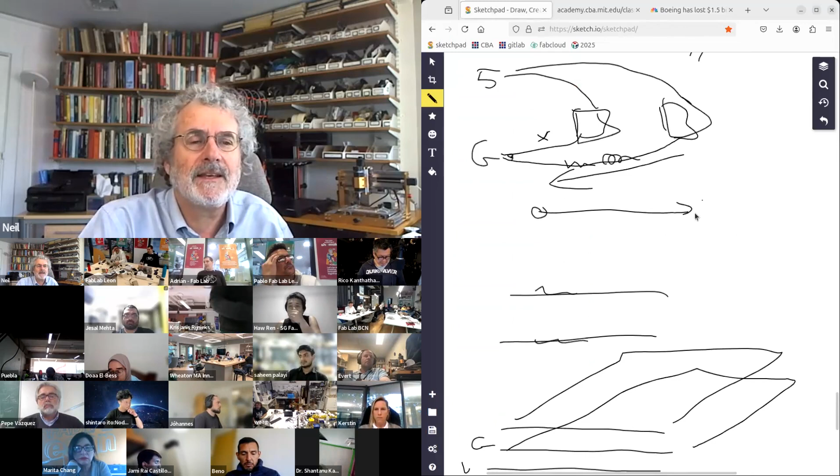It's important to fail. This is one of the worst examples of what I described earlier in the class, starting at the beginning and going to the end versus working in bigger and bigger spirals.

Boeing's Starliner is a billion dollar project. They finally flew it once, then flew it again, and that failed, and it's going to be canceled soon. It's an extreme form of trying to get everything right, spending billions of dollars, and then seeing if it works. SpaceX, noting some controversy around them, has done a good job of rapid iteration, testing a lot and failing a lot.

I'll add a link here. I gave a talk about this, an MIT TEDx talk. Let's see why that's not working. I'll add a link to this talk. Let's see, yeah, let's not, this is probably a better link to it.

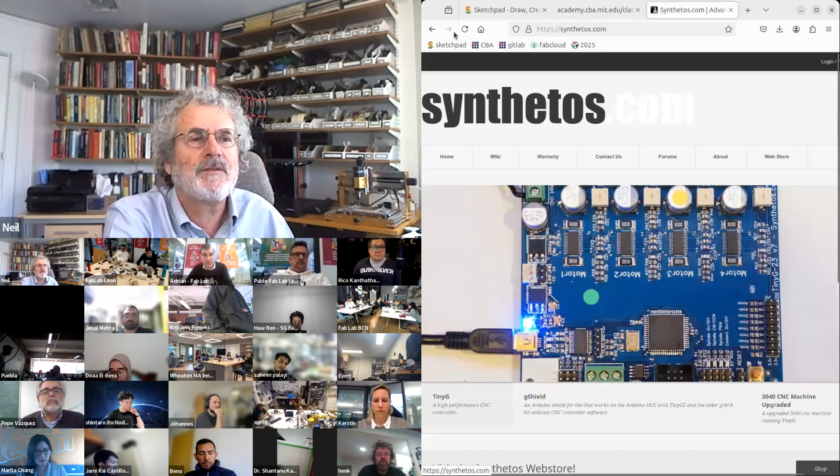So again, just for motor control, if we go to mechanical machine design, and then if you take one of these, if this fails there's not much you can do. But if you make a modular motor controller module, a processor module, a COM module, if something fails you can take parts apart, test them separately, and assemble them back together again—both mechanically and electronically and in code.

If you have one big program, you can't test it. It's generally a good principle to have lots of parts you can take apart. Again, to debug, you can debug from the top down by taking parts out of the system, or you can debug from the bottom up by adding parts into the system.

This is an amusing note about an amusing person. Widlarizing is the name for enthusiastically destroying something that breaks. And that doesn't help debug the system, but it helps you.

Ilmenau is asking a question about connectors. So that's a tricky question. Connectors are good because they give you modularity and let you separate parts of the system.

Bob Moog's pioneering synthesizer company eventually failed because he had put chips in sockets to make it easy to change them. But when he shipped them, they would come out of the socket, and it made the systems unreliable. That's one of the reasons the company failed.